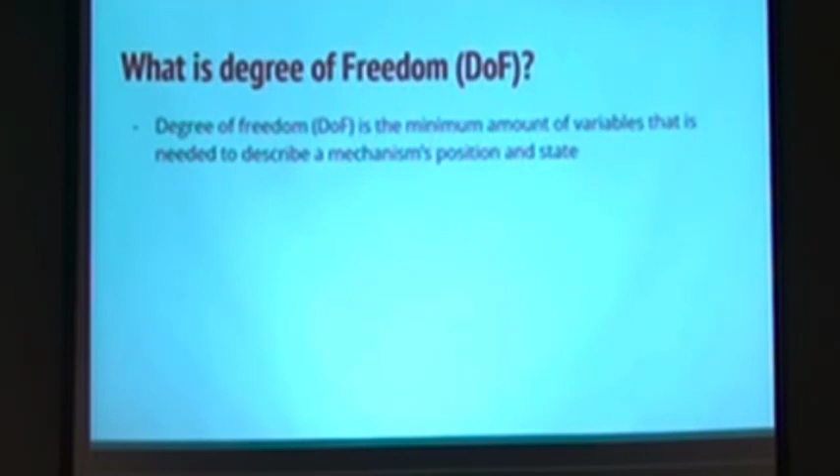Alright, so what is degree of freedom? Degree of freedom, which is abbreviated to DOF, is the minimum variable required in order to describe an object in a space. So when I have an object in 3D space, for example, then I need at least 3 different kinds of variables, x, y, and z, in order to describe its position, right? So the number of variables required is called the degree of freedom. It describes how freely an object is in space or a plane.

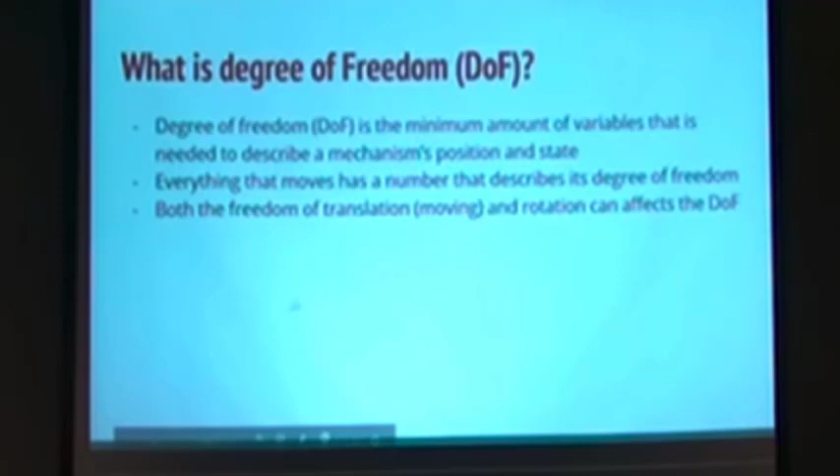So everything that moves, or almost every object, has a degree of freedom. So not only the translation or the position of an object describes its degree of freedom. The rotation also describes the degree of freedom, because the object can rotate, right? It can rotate on the x-axis, on the y-axis, on the z-axis. That's why we also need a variable to describe how it's rotating. So it always describes how freely an object can move.

So in general, the more degrees of freedom you have, the easier it is for you to move around and do more complicated, different kinds of motions or positions. Because the more degrees of freedom you have, it means that it's more free for you to rotate or translate or do different kinds of motions or positions.

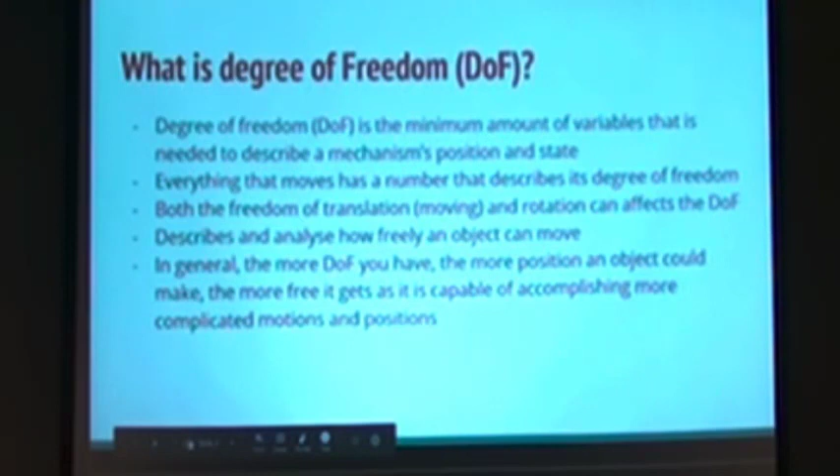Okay, so I'll just give a few different examples of degree of freedom. An object in 3D has 6 degrees of freedom, just as I said. In the diagram here, you can see how degree of freedom works. So imagine a head. A head can move up and down, left or right, frontward and backward. So that's 3 degrees of freedom that describe its position in the 3D space.

But it can also rotate. It can turn to the left, turn to the right. It can look up, it can look down, or it can just roll on the frontward axis, right? So you need at least 6 different kinds of variables in order to describe how a head is positioned in the space. So that's why we say that an object in 3D space has 6 degrees of freedom.

So a point on the line. A point on the line has 1 degree of freedom because you only need 1 variable to describe its position, right? An example of it would be a train on a straight track. You only need 1 variable, the distance, in order to describe the position of the train. It can't rotate, it can't go up or down, it can't go left or right, it can only go straight ahead. So we say that a train has only 1 degree of freedom.

An object on a 2D plane can have up to 3 degrees of freedom. So just look here. Let's say I have this object on a 2D plane. It can move front and back, it can move left or right. So that's 2 degrees of freedom. But it can also rotate on this axis here. So if I need to describe this object, I need at least 3 degrees of freedom, like 3 variables. So we say that this object has 3 degrees of freedom on a 2D plane.

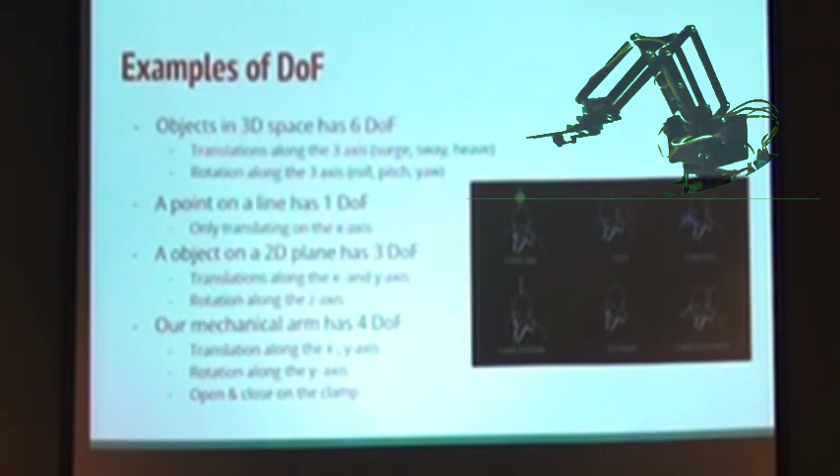So you know that our mechanical arm can move frontward and backward, and it can rotate to another angle, right? So that's 3 degrees of freedom by its own. And we also need 1 more variable to describe how it's open, like if it's open or not. So that requires an extra degree of freedom.

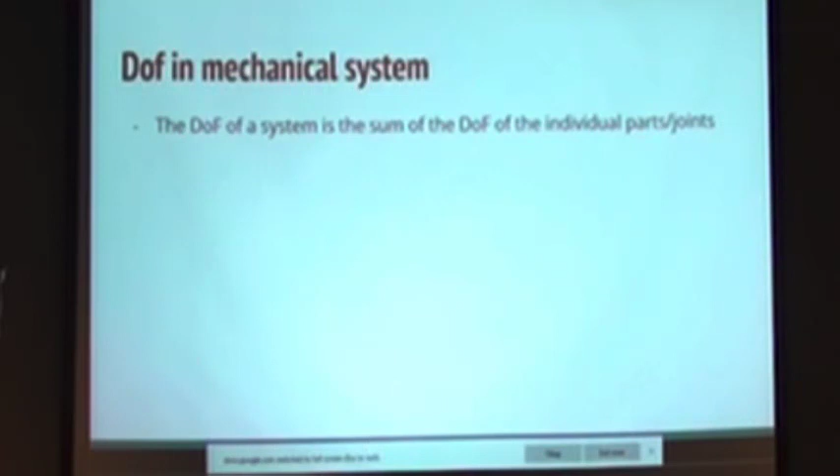Okay, so now we're going to talk about degrees of freedom in a mechanical system, like a robot or a mechanical arm. So it's easy for us to visualize how many degrees of freedom there are for 1 single robotic arm. But what we're going to talk about next is robots and different kinds of systems. So the degree of freedom of a system is just the sum of degrees of freedom of individual parts.

If we think about a robotic system of 2 of our mechanical arms, we need 2 sets of different variables because each arm moves independently, right? So we need up to 8 variables in order to describe both of the mechanical arms. So the total system has 8 degrees of freedom.

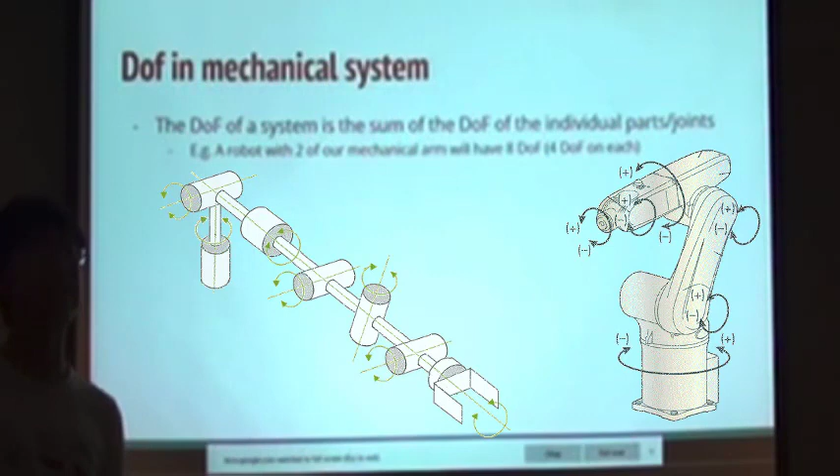So in robotics, you can just think of degree of freedom very simply as the number of motors you have. Because for each motor you add, you need an extra variable to describe how much the motor is rotating. So because our mechanical arm has 4 motors, we can just simply say that it has 4 degrees of freedom. So that's a really easy way to understand degrees of freedom.

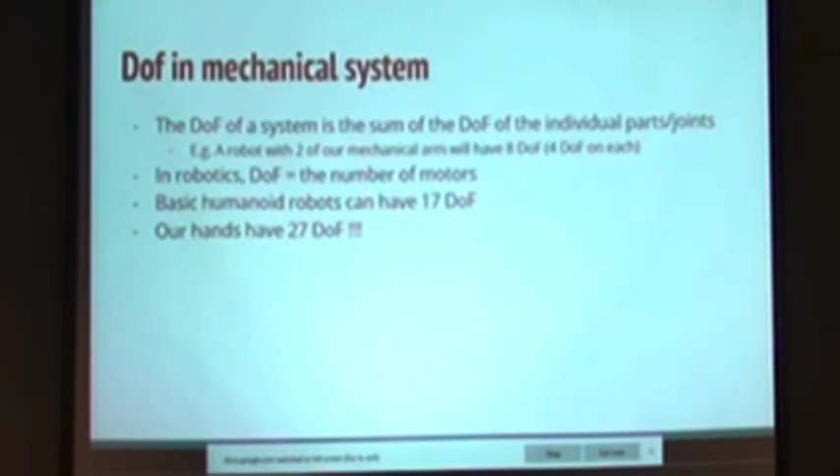So some humanoid robots can have up to 17 degrees of freedom, because just look at these kinds of humanoid robots here. It has 17 motors. So because each motor is independent and it can move, we need 17 different variables in order to describe its position and its movement. So we say that it has 17 degrees of freedom.

So our hand has up to 27 degrees of freedom. Our fingers have 4 degrees of freedom, our thumb has 5 degrees of freedom. And our hand itself, its position and its rotation, gives us an extra 6 degrees of freedom. So we say that our hand has 27 degrees of freedom. That's why it's very hard for robots to mimic our hand, because our hand is so effective in doing different kinds of motions, different kinds of positions.

Let's say this kind of robotic arm here. It's really effective in grabbing or doing different kinds of translation, moving, but it can't do something like a fist bump or counting or clapping, for example. It can't do positions like these or these or these. You need different kinds of joints. You need a higher degree of freedom in order to do what our hands do. So that's why robotics so far is finding it really hard to mimic our hand.

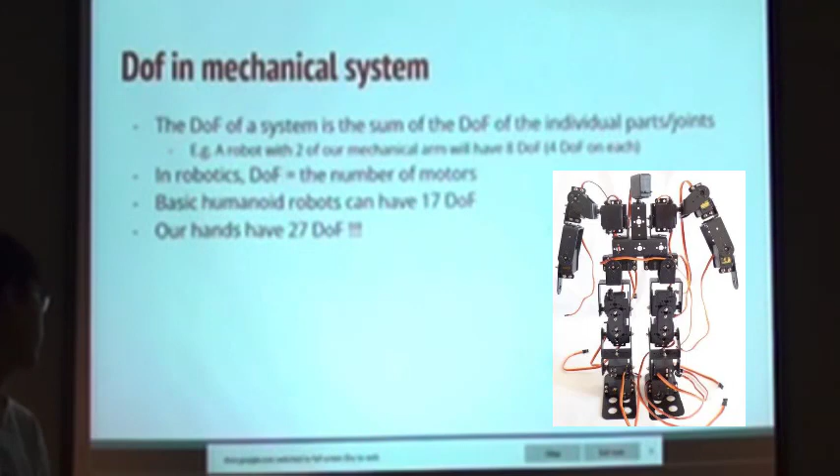So that's the end of my presentation. Are there any questions you want to ask about this video?

Yes? Yeah, you mentioned fingers having 4 degrees of freedom and the thumb having 5. What's the extra one? So for the thumb, you have 1 degree of freedom for your first one. You have the 2nd degree of freedom here. You have your 3rd degree of freedom here. You have your 4th degree of freedom here, because this lower part also counts biologically as a thumb. So this part here has 2, this part here has 2, and the thumb here itself has 1, sorry. Oh, okay. So that totals 5.

And fingers, you can do 1 degree of freedom here, the 2nd degree of freedom here, the 3rd degree of freedom here, and then you have the 4th degree of freedom here. Okay. Oh, that makes sense.

Okay. Is there anything else? Emma? Any question, Emma? No?